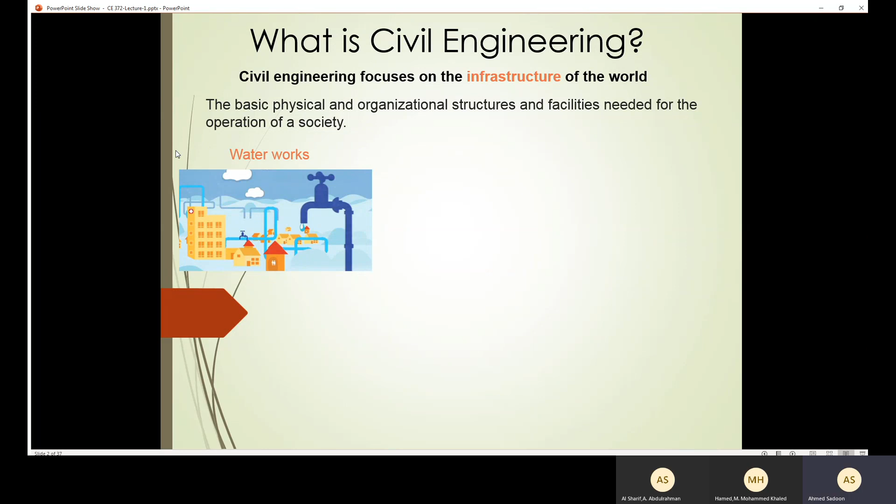So we are going to see examples of infrastructure that the civil engineering field is going to focus on. We have the water works. Nowadays in our home, school, and hospital, we have a source for water. In order to do that, we need to develop a system so that the water is going to be pumped to all the houses and industrial plants. In order to do that, we need the work of civil engineering.

Also, we have the sewers. Through the sewers, we're going to be able to get rid of the wastewater. And we have the dams. Through the dams, we are going to hold the water so that we can release and hold it whenever we want, to organize agricultural activities, and also through that we will be able to generate electricity. And also we have the power plants.

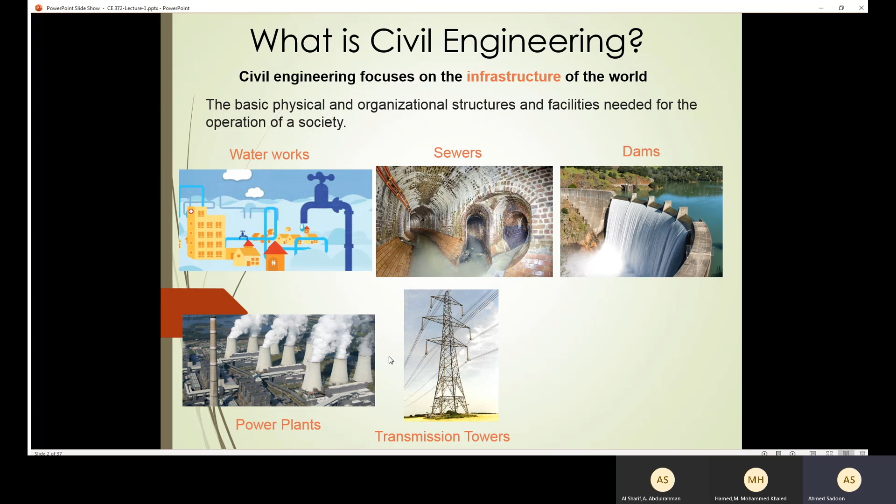The whole industry depends on the power plants in order to manufacture different items. And we have the transmission towers. Through that, we are going to transmit electricity from one place to another. And we have the railroads. Through that, we'll be able to use trains throughout the countries.

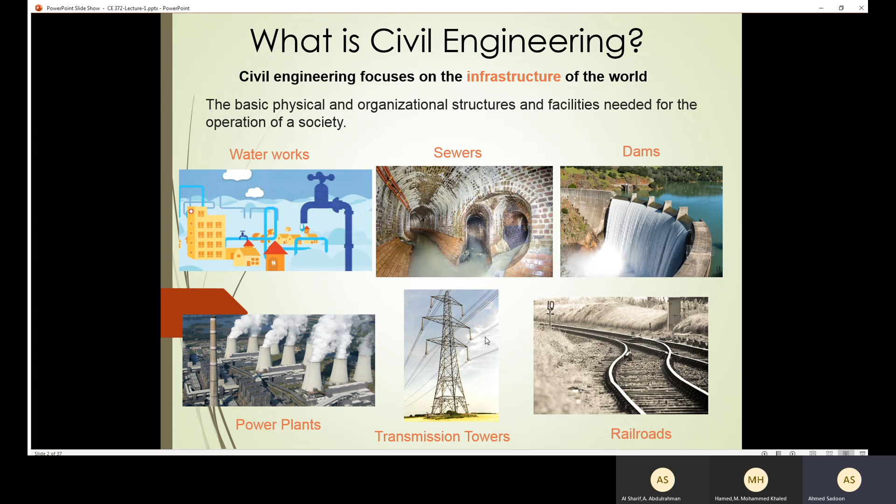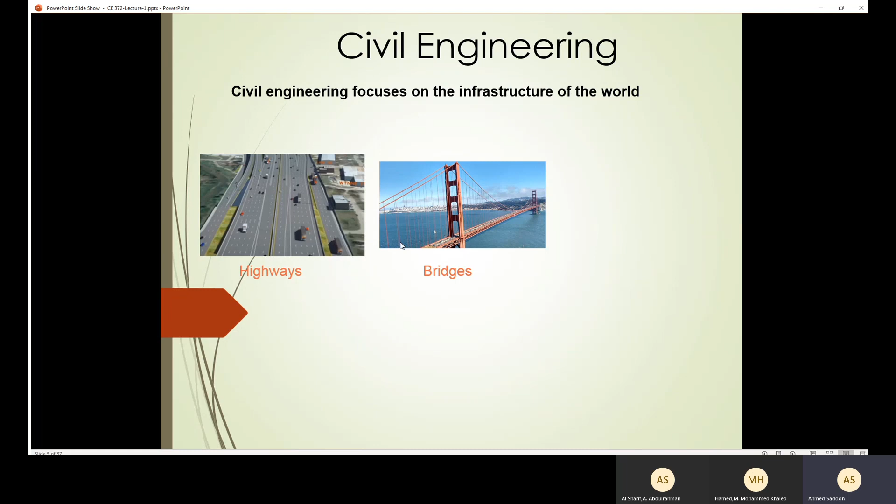And also we have the highways. The highways are very important so that cars and trucks will be able to move from one city to another. We have the bridges. In many cases, we have waters, seas, or rivers that prevent people from moving from one part to another. Through the bridges, we will be able to connect places.

And also we have the tunnels. The tunnels are very important. Sometimes we have a mountain that prevents the movement of goods and people. So through the tunnel, we are going to create a solution.

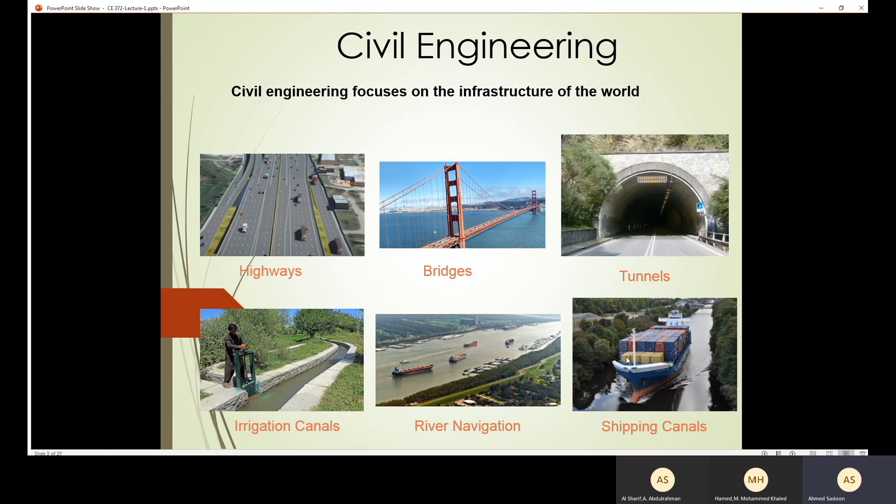And we have the irrigation canals. We are going to use that in order to regulate our agricultural activities. And also we have river navigation. Through that, we are going to organize the movement of ships. And we have the canals for shipping, like a ship that is very huge, so we have specific regulation in order to manage something like that.

Also, in civil engineering, we have the transportation part. Through that, we'll be able to control the traffic so that we minimize accidents and facilitate the movement of cars. And also we have the airport runways, the industrial plant buildings, and the skyscrapers and so on. So civil engineering focuses on the infrastructure of the world.

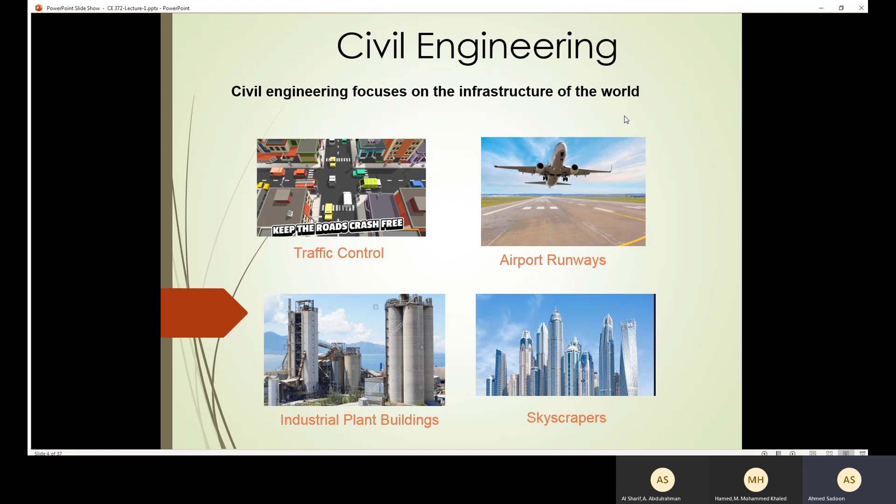In the beginning, civil engineering included all engineers that did not practice military engineering. So if you did not practice military engineering, it means you were practicing civil engineering. In the olden days, civil engineering included all engineers except those who practiced military engineering. So you were either practicing military or civil engineering.

We believe that civil engineering began in the 18th century in France. The first one who claimed to be a civil engineer was John Smeaton, who constructed the Eddystone Lighthouse. He constructed this structure, and he is the first one to call himself a civil engineer.

And civil engineers, through their huge work, have saved more lives than all the doctors in history. The reason is simple: because of the development of clean water and sanitation systems. Through civil engineering, we managed to provide clean water and also get rid of wastewater in a safe way. Through that, we saved more lives than all the doctors. So civil engineering is a very important discipline.

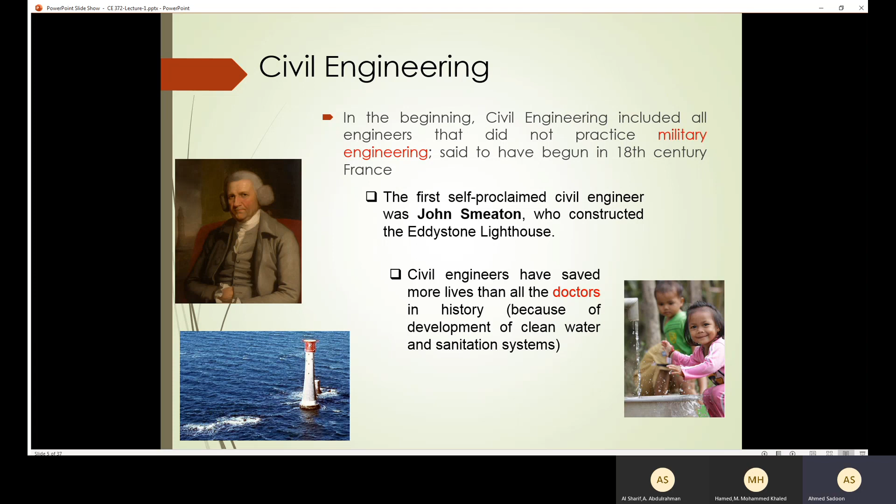Most civil engineering projects involve many processes: the planning, the design, the construction, the operation and maintenance, and the rehabilitation.

We are going to go through each one of them in order to explain what it means. First, we have the planning.

Planning means that I'm going to have an area that contains a problem, or an area with a problem, and that area is going to need improvement.

We need to gather inputs from the public and from the Ministry of Transportation in order to construct the underpass. So the first step is the planning.

I need to find an area that needs to be improved, then set the criteria for the design, and gather information from the public, or the information needed to construct the project.

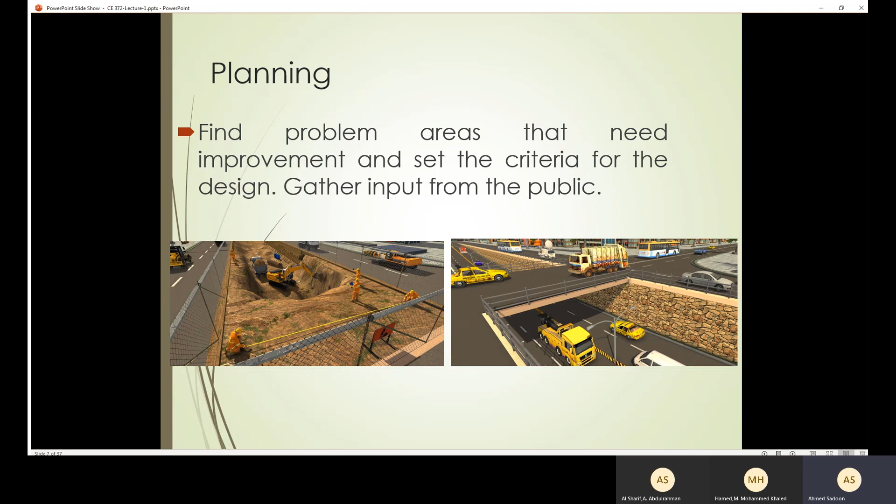So here, first I identify the area that needs to be improved, then I need to come up with drawings to show how the problem is going to be solved. That's what is meant by the design.

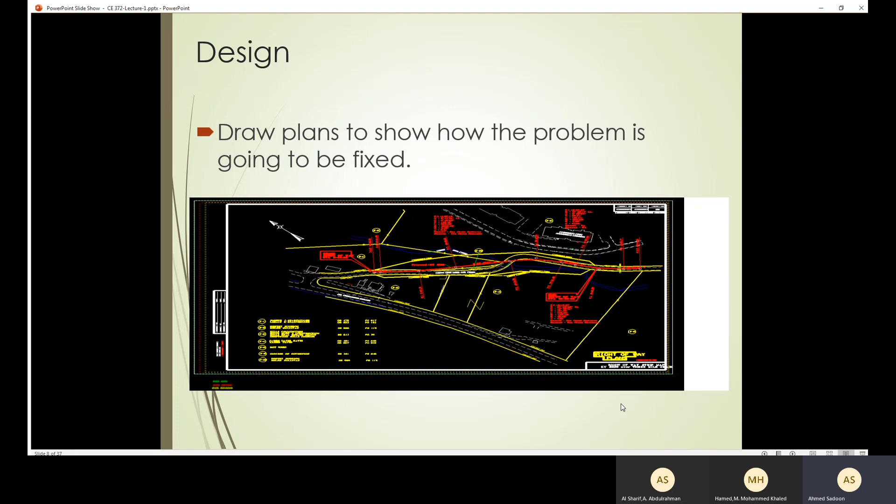Then we have the construction part. So now everything is on paper, and I need to implement those drawings — that process is called the construction.

So construction comes after the design, and it shows us how to build the solution to the problem through the construction.

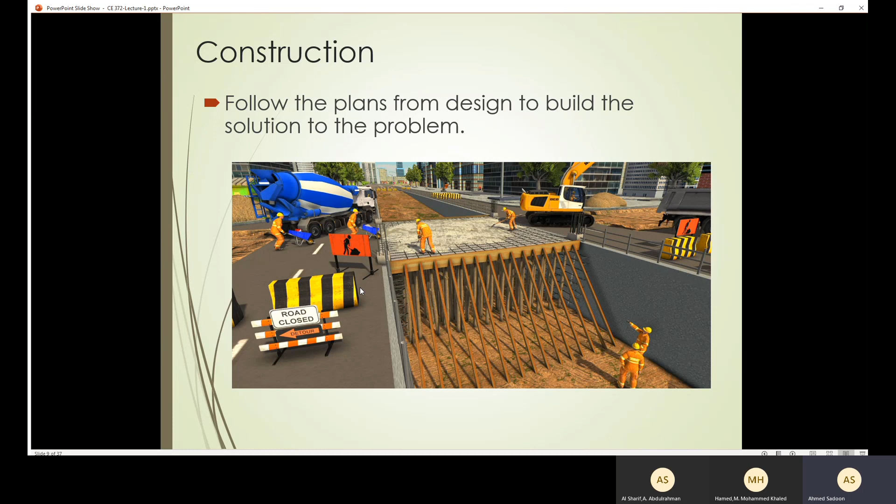Then the project is finished, but we need operation or maintenance, because through the life of the structure we are going to have small problems that we need to fix.

We call this maintenance. So every year or two years we are going to fix the small problems that may arise from the structure.

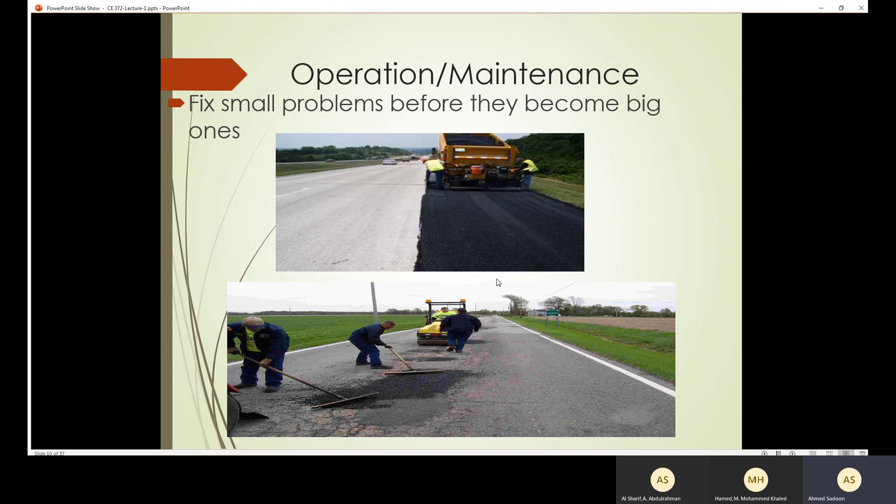And finally we have the rehabilitation. Sometimes the structure may have spent like 20 or 30 years, and the structure is really in very bad shape.

In that case, if I intend to fix the structure to be similar to the original case or the original structure, we call this rehabilitation.

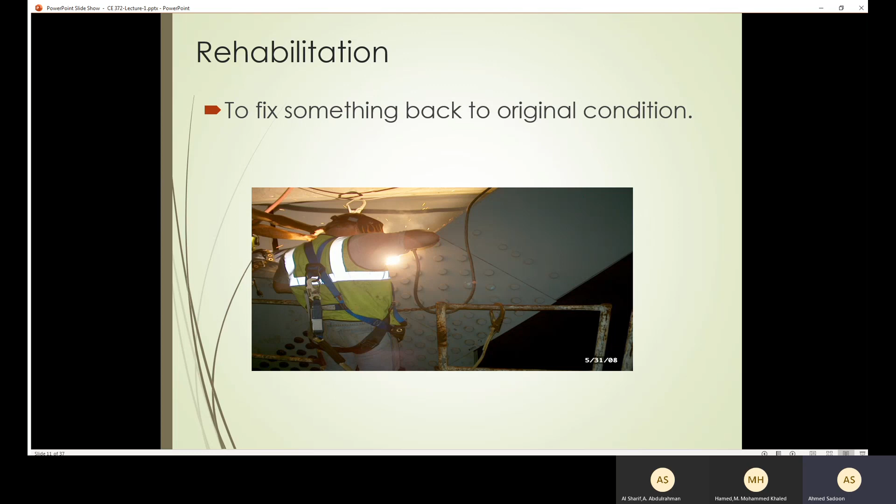So rehabilitation means that I'm going to make changes so that the structure becomes similar to the original one.

So it's very important to know the civil engineering process: the planning, the design, the construction, the operation and maintenance, and the rehabilitation.

Now I think most of you will be able to tell the difference between those five processes.

Now we are going to talk about civil engineering specialties. We have many specialties in civil engineering: construction, structures, environmental or water quality, and surveying.

We have transportation, water resources, geotechnical, hydraulics, and materials. So we have many specialties inside civil engineering.

Let's start with the first one, the construction engineers. The construction engineer is responsible for managing the construction resources.

If you have engineering projects, then you are going to have construction resources: laborers, materials, equipment, money, and time. So we need to regulate all of these resources.

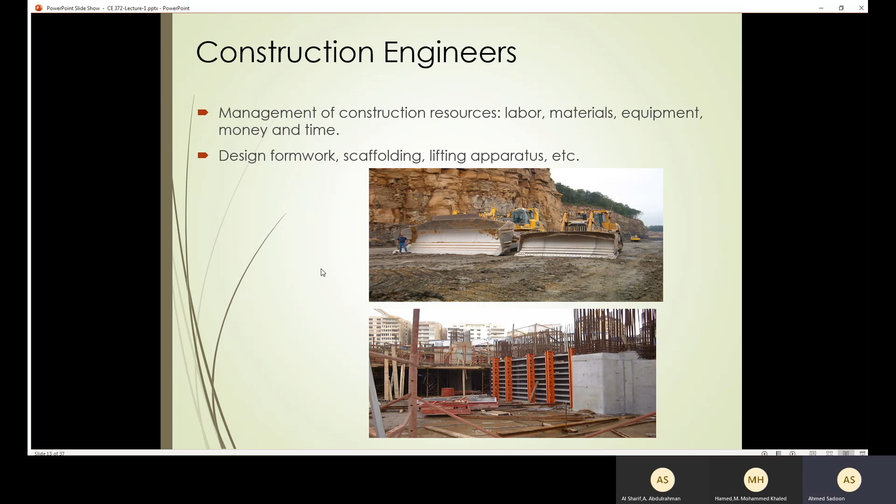Also, he should be able to design the formwork, the scaffolding, and the lifting apparatus, etc. As a construction engineer, you should be able to do that.

Also, we have the materials engineers. As a material engineer, you should be able to design, analyze, and construct materials.

We have many materials in civil engineering: steel, concrete, masonry, asphalt, and composites. You should be able to analyze, construct, and test those materials before using them.

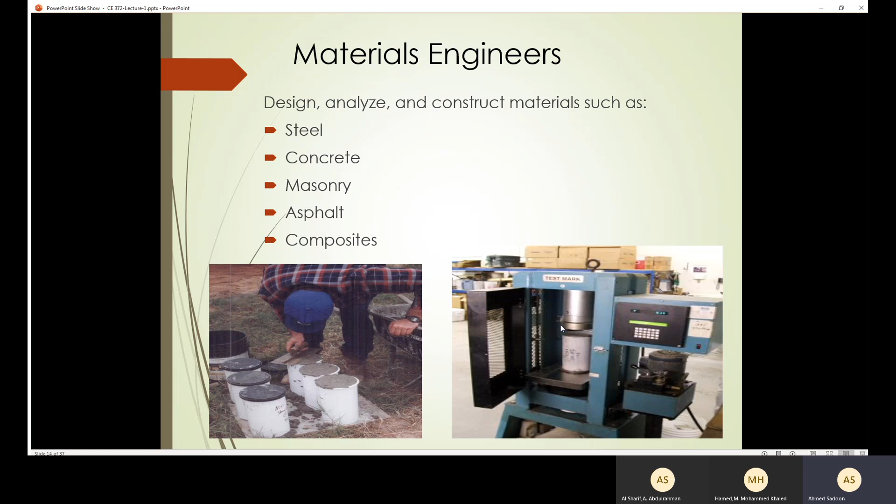You should be able to design, analyze, and construct them. For example, if you are using concrete, you should test it to make sure it meets certain criteria, like the compressive strength, the slump test, and so on.

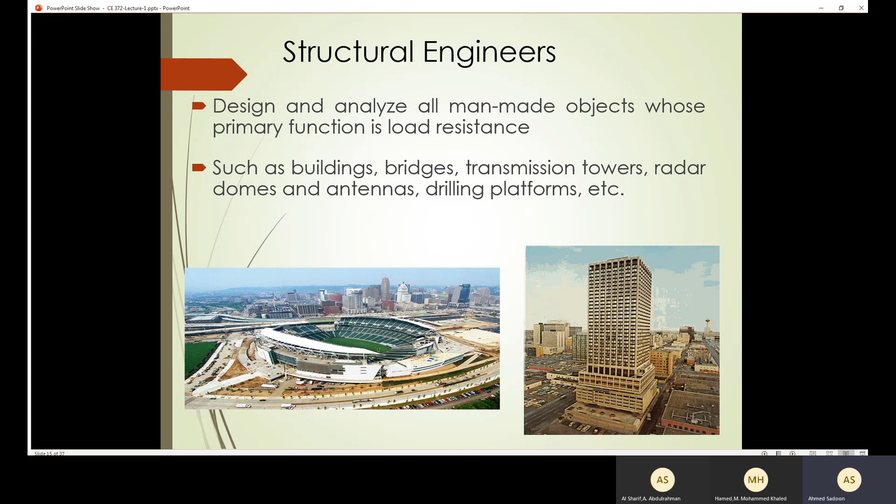Those who have the ability to design and analyze all these man-made objects, we call structural engineers. Also, we have surveyors.

Surveyors are responsible for measuring distances, angles, and positions to precisely locate and lay out engineering projects. In all engineering projects, we need to locate a certain element at a certain position and level. To do that, we use surveying devices like the total station to measure distances, angles, and position. You'll find them in all civil engineering projects, involving the use of GIS, GPS, and laser distance measurement devices.

They are also responsible for producing topography maps. Through topography maps, we are able to know the elevation of the points in a project.

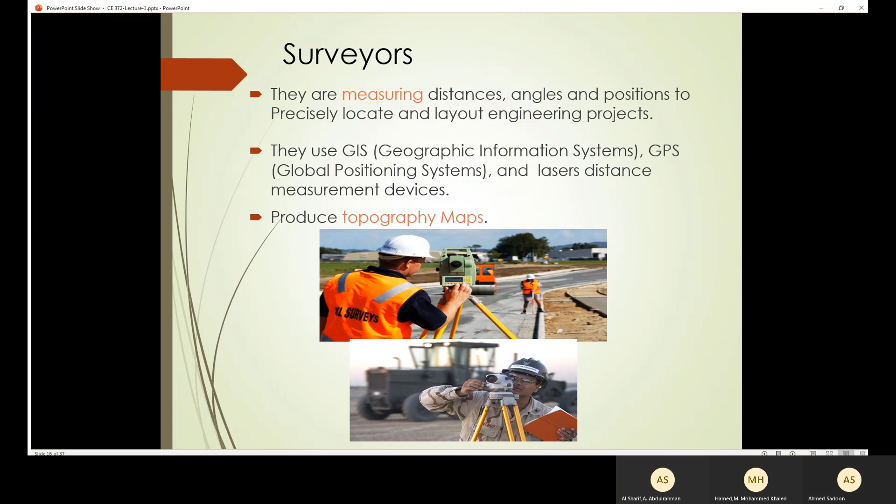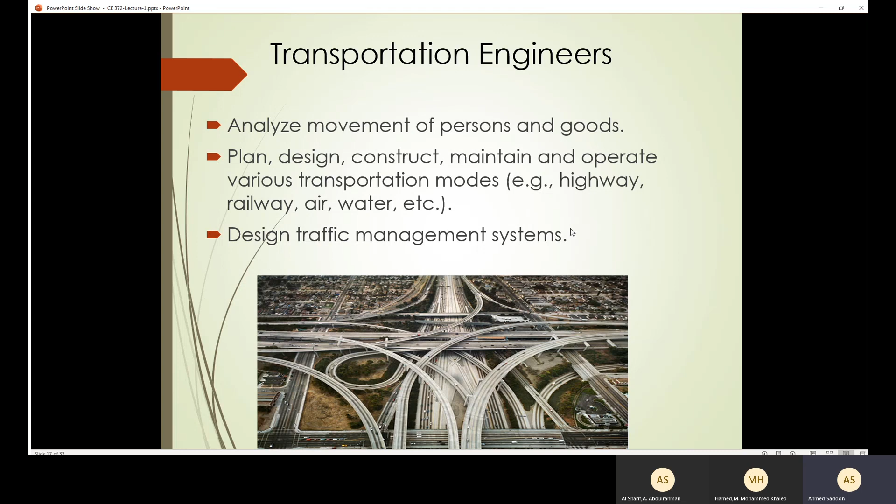We also have transportation engineers. They are responsible for analyzing the movement of persons and goods, making sure people go from one place to another smoothly, and that goods are relocated from one city to another. The job of transportation engineers is to facilitate the movement of persons and goods. This involves planning, designing, constructing, maintaining, and operating various transportation modes like highway, railway, air, and water, as well as designing traffic management systems. Those who do that, we call transportation engineers.

We also have environmental engineers, who model and monitor the movement and behavior of water pollutants in natural waters. We have many natural waters, and in order to have clean water, we need to model and monitor the movement of those pollutants. To do this, we apply fluid mechanics, biology, and chemistry to design and operate environmental control systems, like municipal and industrial wastewater systems. Those who do that, we call environmental engineers.

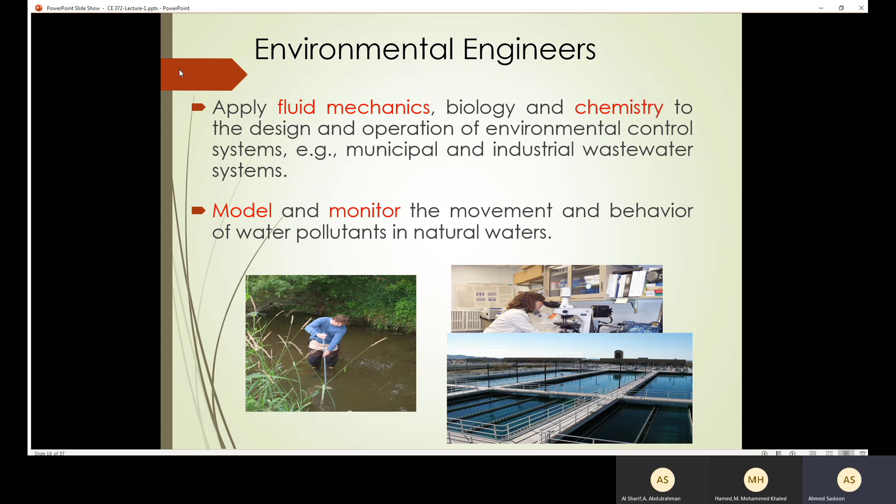We also have hydraulic engineers. We have liquids like water or oil that need to be transported from one place to another. To do that, I use a system of pipes, and I also need hydraulic machinery such as pumps and turbines. Those who do that, we call hydraulics engineers. They are responsible for the movement of liquids from one place to another.

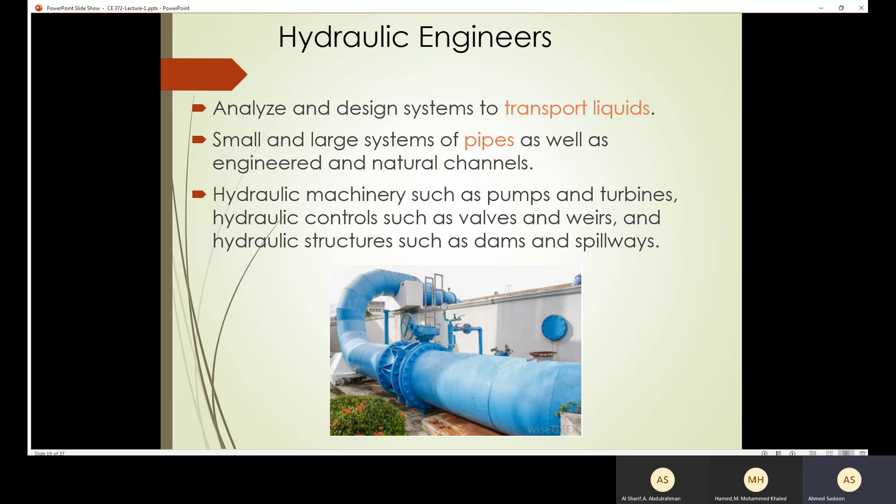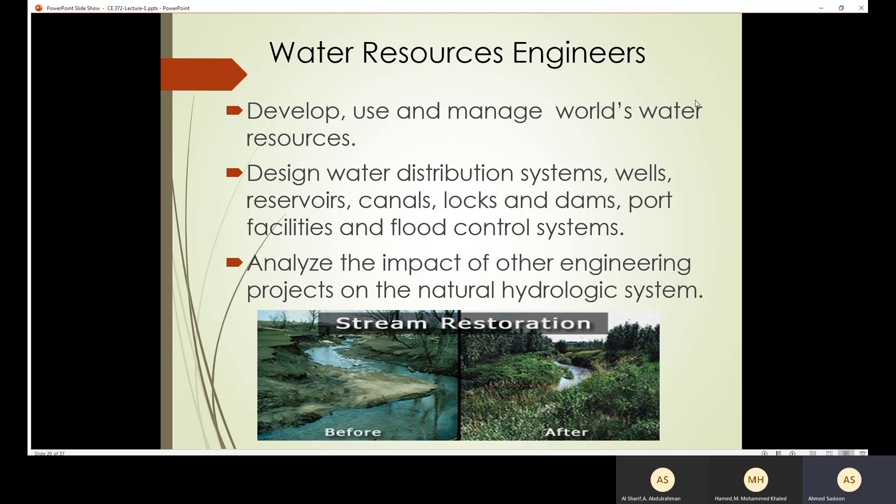Finally, we have geotechnical engineers. To start any project, you need to deal with the soil. In order to analyze the soil and rock that affect the behavior of structures, pavement, underground facilities, and containment structures for solid and liquid waste, we design foundations, retaining walls, roadway cuts, and conduct field and laboratory work along with the design. We call this geotechnical engineering.

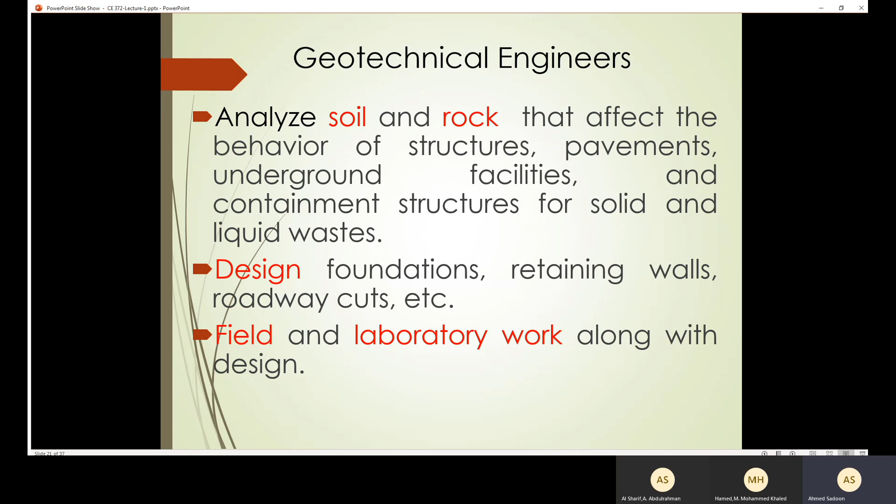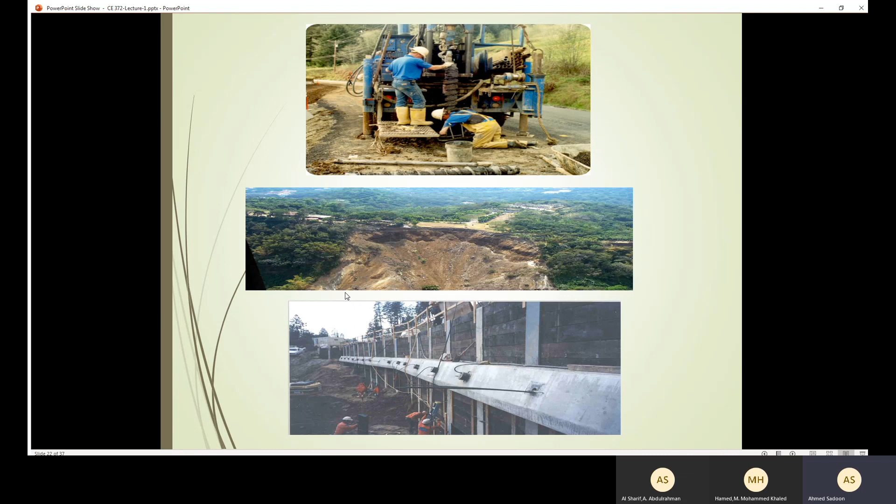Here we have a retaining wall to prevent the soil from moving inside the project. Here we have a collapse because of the soil. So if you don't have, for example, a retaining wall, the soil is going to collapse. It's very important to provide a retaining wall. All civil engineering work begins with geotechnical engineering, like I just said. So if you have an engineering project, you are going to deal with the soil.

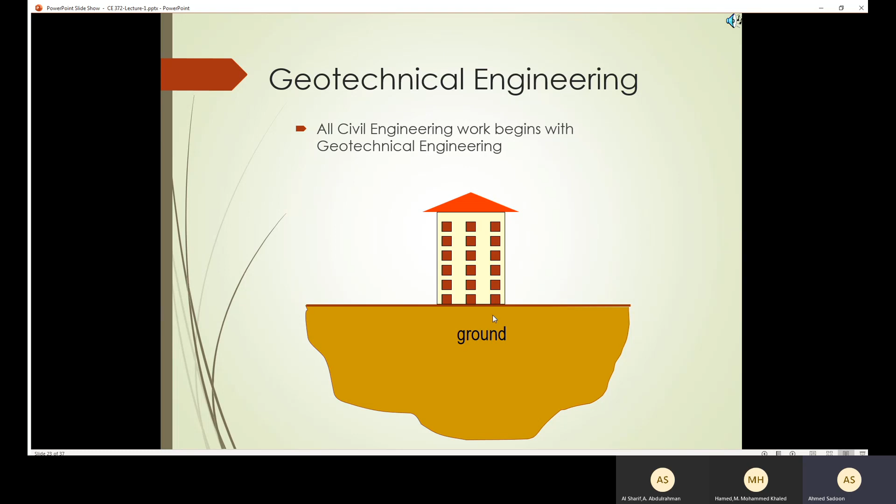Those who are going to specialize in geotechnical engineering need to know soil mechanics, and also need to know the difference between soil mechanics and geotechnical engineering. In soil mechanics, we apply the principle of strength of material in order to predict the mechanical behavior of the soil.

Geotechnical engineering is a branch of civil engineering that deals with soil, rock, and underground water, and their relation to the design, construction, and operation of engineering projects. So soil mechanics only studies or applies the principles of engineering mechanics to know the mechanical behavior of the soil, while geotechnical engineering involves soil mechanics combined with design, construction, and operation of engineering projects. So geotechnical engineering is the broader term.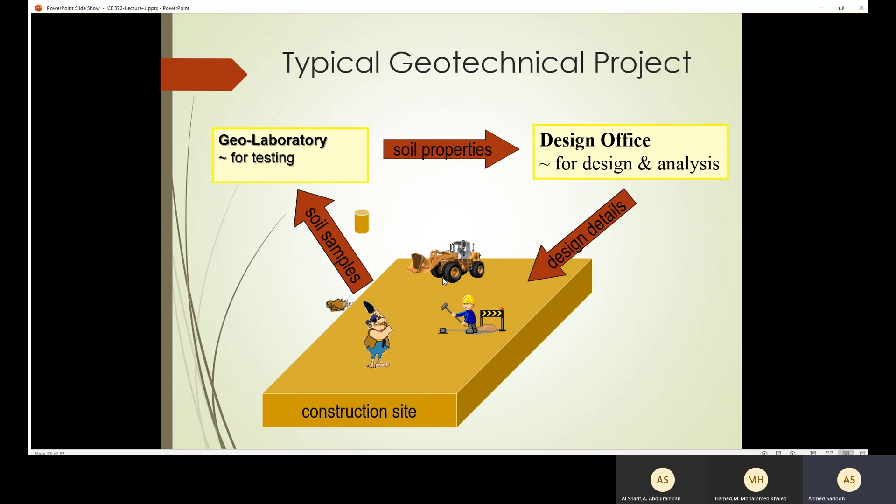An example for that is the compaction process. In order to make compaction in the construction site, I need to take a sample so that I can know the optimum water content, and through that I'm going to be able to implement the compaction.

Regarding foundations, we have two types: shallow foundations and deep foundations. The foundation, generally, is used to transfer the building loads to the underground. So here I have a building, and through the foundation we transfer the load of the building to the ground.

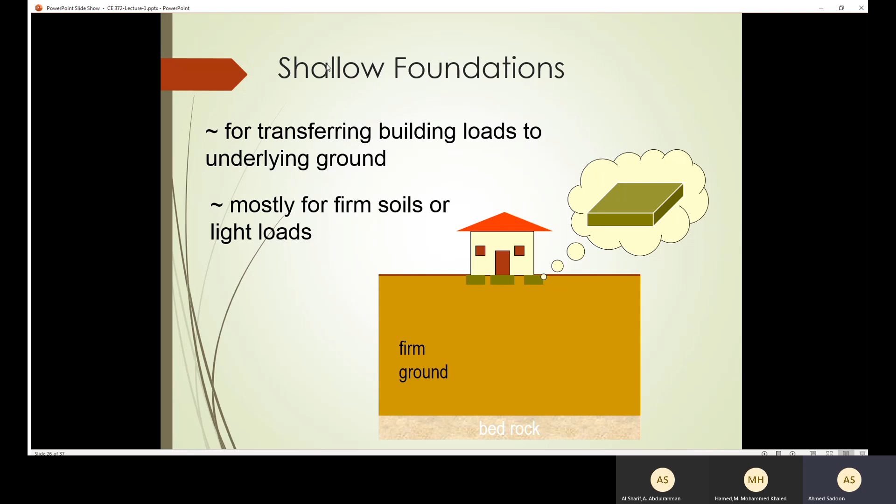Mainly we use shallow foundations for firm soil or lightweight loads. So if the soil is firm or strong and the load is light, it's expected to use a shallow foundation. Examples of shallow foundations are the isolated footing, the combined footing, and the raft foundation.

On the other hand, we have the deep foundation. Also used to transfer the load from the building to the soil, mostly used in case of weak soil and heavy load. So if I have weak soil and heavy load, it's expected to have a deep foundation. An example for that is the use of piles.

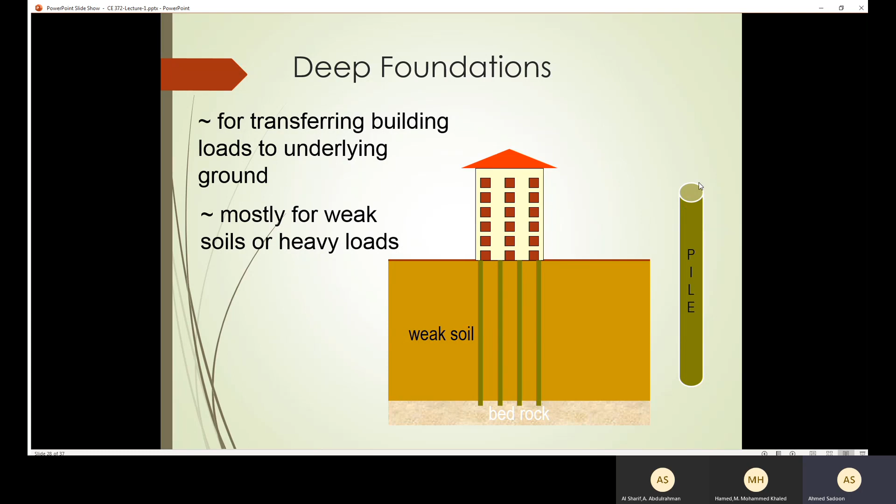Also, one of the most important structures in geotechnical engineering is the retaining wall. The purpose of the retaining wall is to prevent the soil from spreading laterally. So here I have soil around, and here I have an underpass. If I don't have those retaining walls, the soil is going to spread laterally and be there. So it's very important to put the retaining walls.

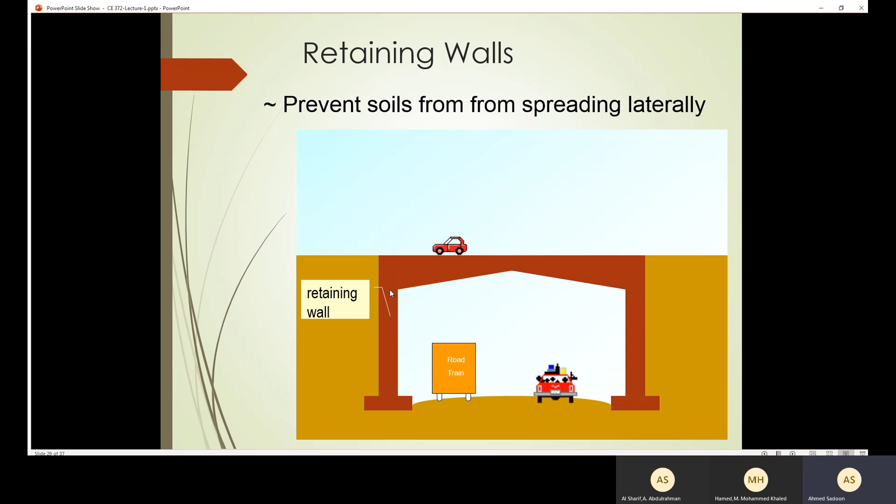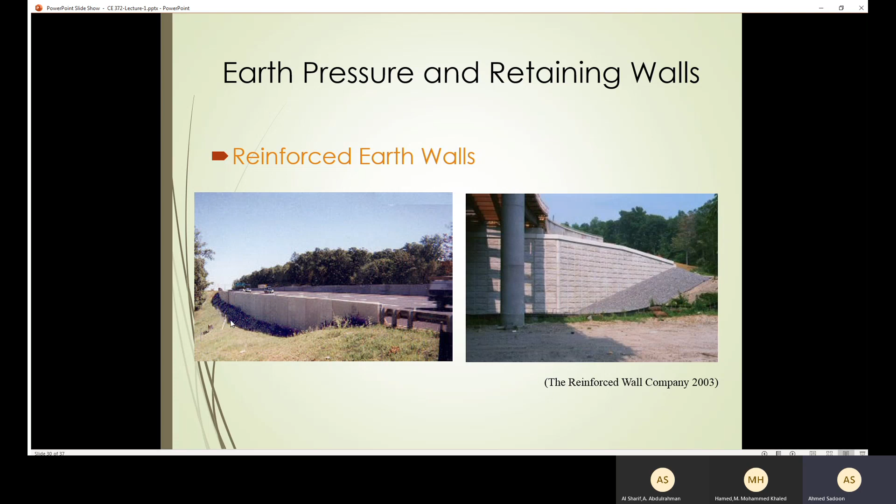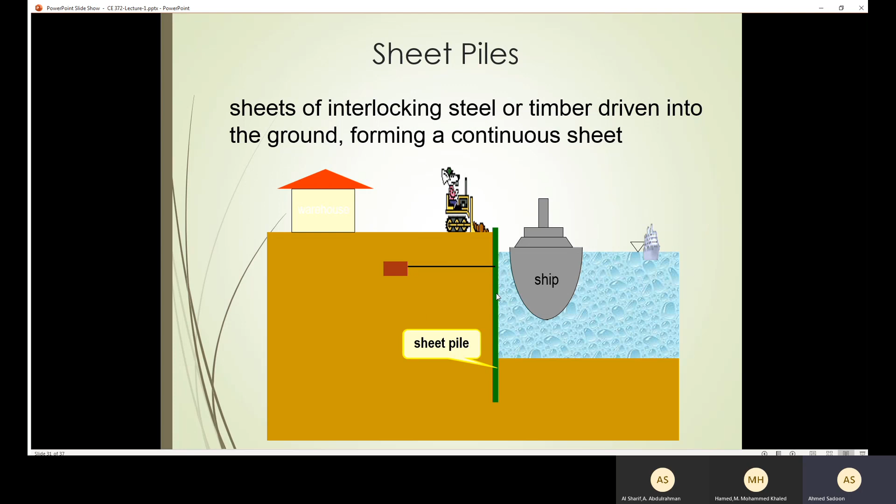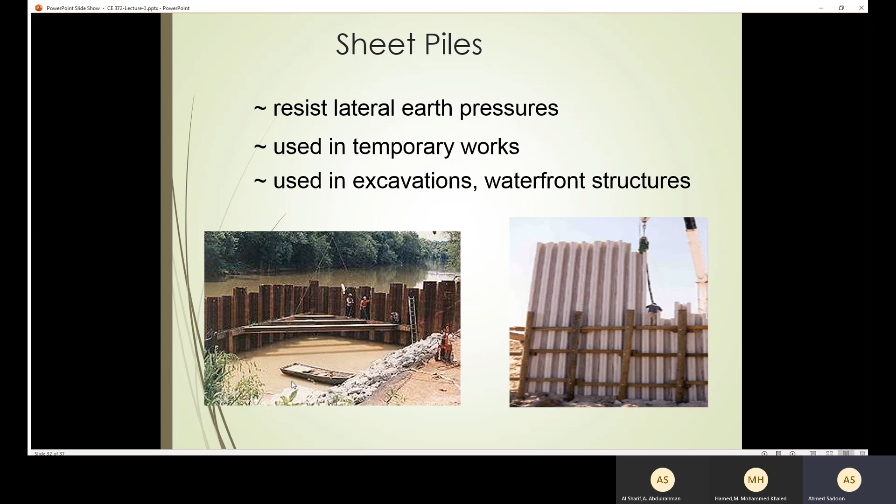Here I have retaining walls here, and retaining walls there. Without those retaining walls, the pavement or highway here is going to collapse. Also, I have the sheet piles, which prevent the soil from spreading around, or prevent water from going there. So here in this engineering project, I'm going to implement sheet piles so that I can isolate the water from the project.

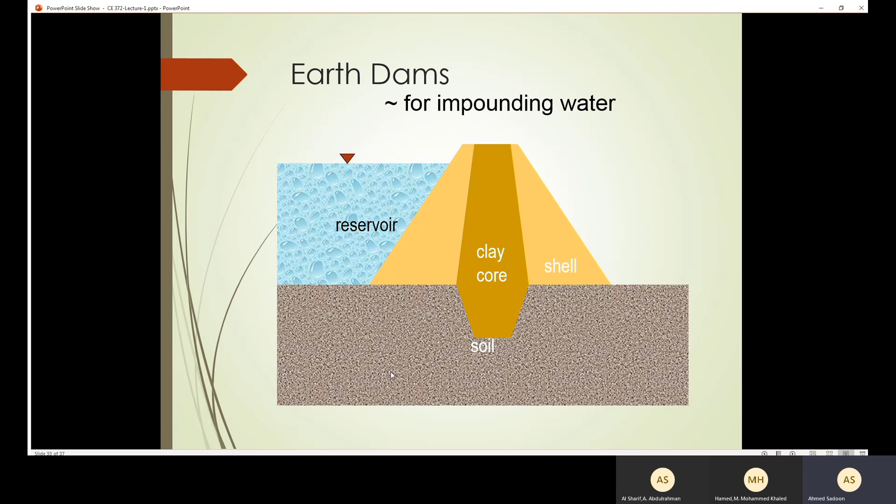And also I have the earthwork. We prepare the ground before the construction; we call this the earthwork. Also, in order to do that, I need to know the condition of the soil. I'm going to stop here.

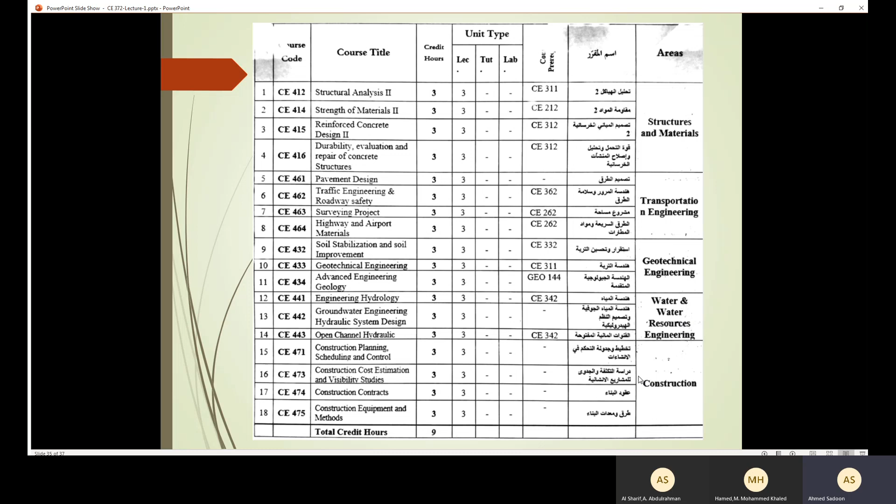As you can see here, we have many disciplines in our department. We have structures and materials, transportation engineering, geotechnical engineering, water and water resources, and construction. So this course should help you decide which discipline you should follow.